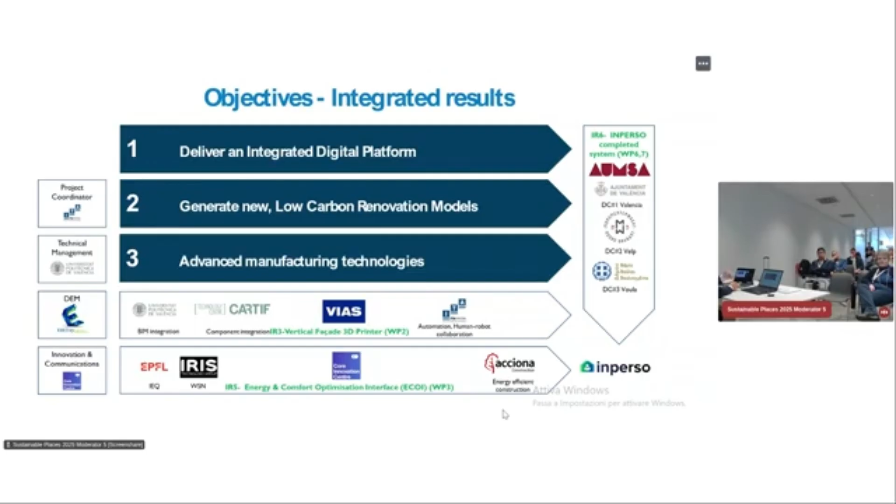The third is to improve the use of advanced manufacturing technologies - specifically, we are going to deploy on-site 3D facade printing, which Juan will explain in the next presentation. We also try to address personalized energy and comfort requirements of users, and finally we want to deliver a complete system test in the 3 pilots we are developing.

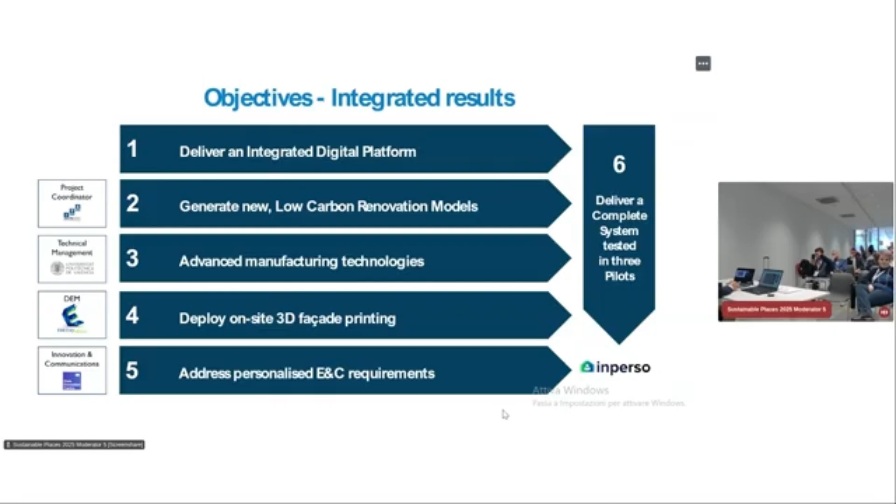And we are going to do this using advanced technologies, starting with the RE Suite platform, an AI and AR-based solution. The platform has already been developed in the project. We are in the third year of the project, and it's been tested in three demo cases in different scenarios.

All the information and data are available through a user-friendly interface, and we are including the Sky tool that can recognize objects from a point cloud and integrate it into a BIM model. It is also connected to the Rialto application, which uses artificial intelligence technology to audit and report on construction management work.

And R2M is developing a big part of this.

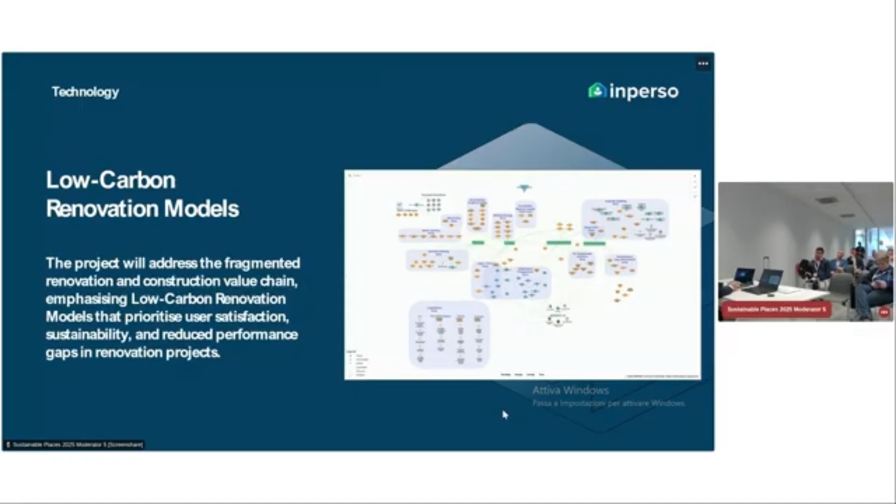Moving to the low carbon renovation models, INPERSO aims to address the fragmented construction value chain. The low carbon renovation models developed are prioritizing user satisfaction and sustainability, working together with all the stakeholders. We have also developed a dynamic map that has been integrated into the RE Suite platform, which will help all participants make better decisions.

The energy and comfort optimization interface is the last of the digital tools. It consists of a multi-stage energy consultant system that is connected to this interface, using a low-cost wireless sensor network to evaluate air quality, energy demand, and comfort conditions.

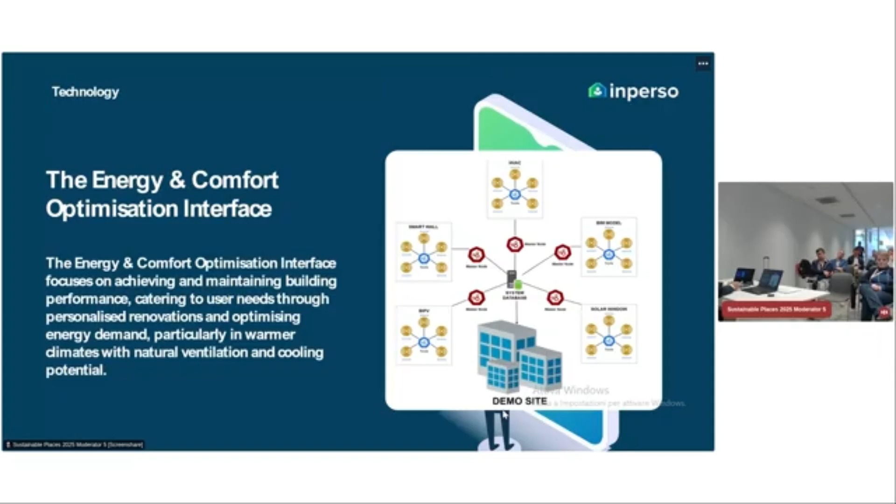And finally, the retrofit kit, the physical part of our project. It aims to reduce construction and demolition waste, enhance productivity, upskill the workforce, improve workplace conditions, and reduce embodied CO2 of buildings. This is the retrofit kit.

We can start with the smart wall. It's a prefabricated all-in-one wall panel, a multi-layer system that can even include autonomous air conditioning devices and other types of products such as PV panels, and so on.

The second is the energy pod. It's an intelligent plug-and-play HVAC system that uses PCM material, and it incorporates also energy storage and a PV inverter.

The third one is this type of building-integrated photovoltaic panels to be installed in roofs and balconies, with special interest in heritage buildings. Next, we have the solar window.

The solar window includes a PV Venetian blind shading device inside an insulating window between two glasses.

And well, this kit is composed of some of our innovative products that INPERSO is going to integrate in the pilots in order to achieve TRL 8.

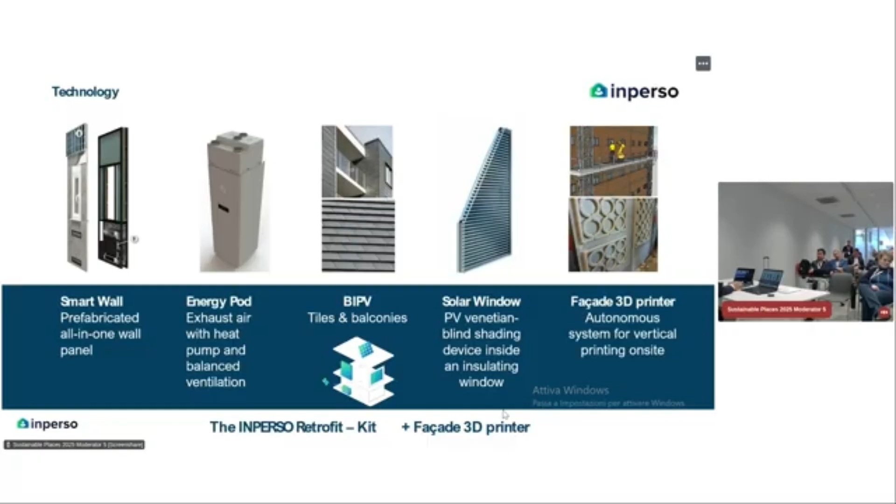Okay, let's move to the pilots, to our three pilots. We are going to explain briefly these technologies that have been implemented in the demo cases. One is located in Spain, the second in the Netherlands, and the third in Greece.

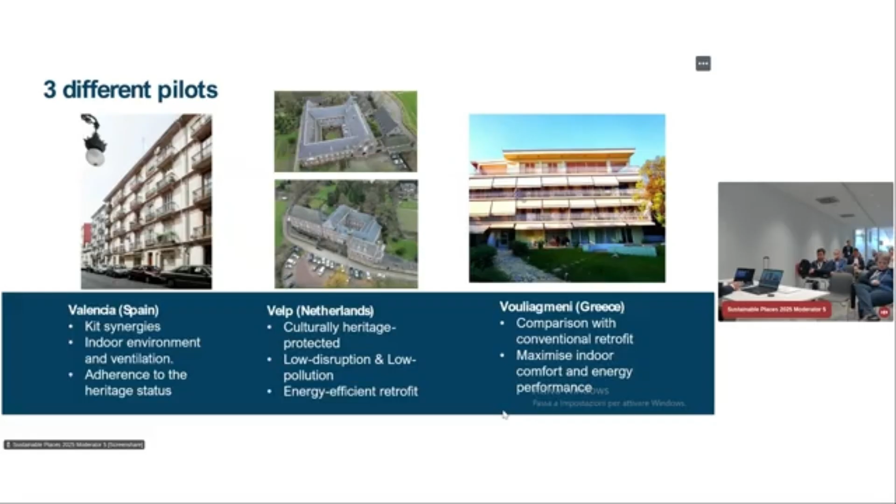The first is a social housing rental building whose main facade and volume are protected, with a market on its ground floor. Calle Estrella is located in the historic center of the city, and you can see in the pictures the two facades the building has, one facing the city and the other the courtyard.

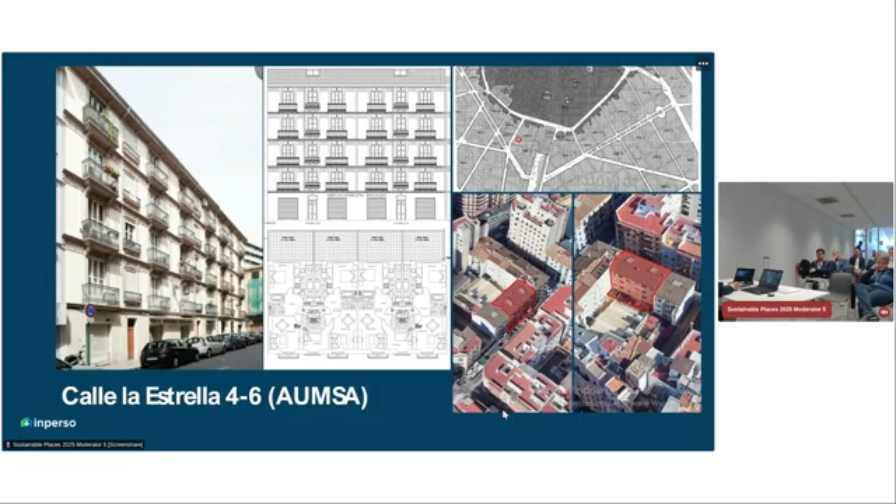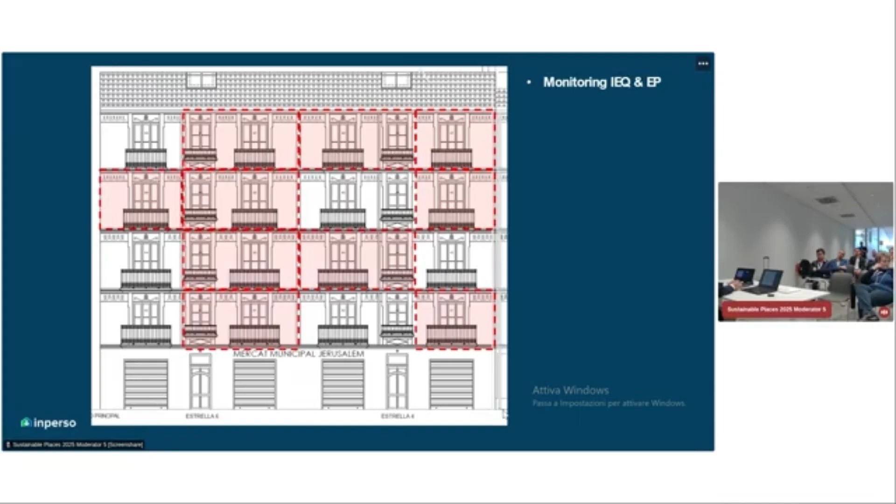And well, we have had multiple difficulties developing this project, but finally we are developing it. Of course, we are monitoring 10 of the 16 apartments, and we are doing interventions in 7 of them.

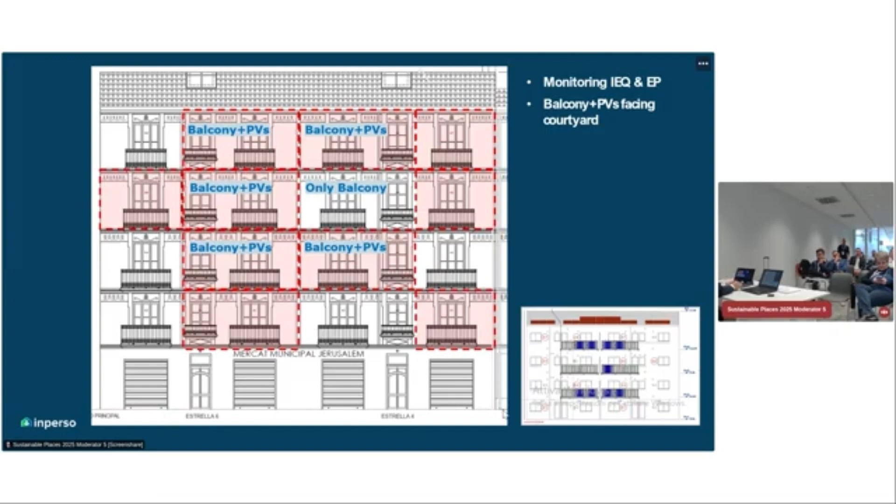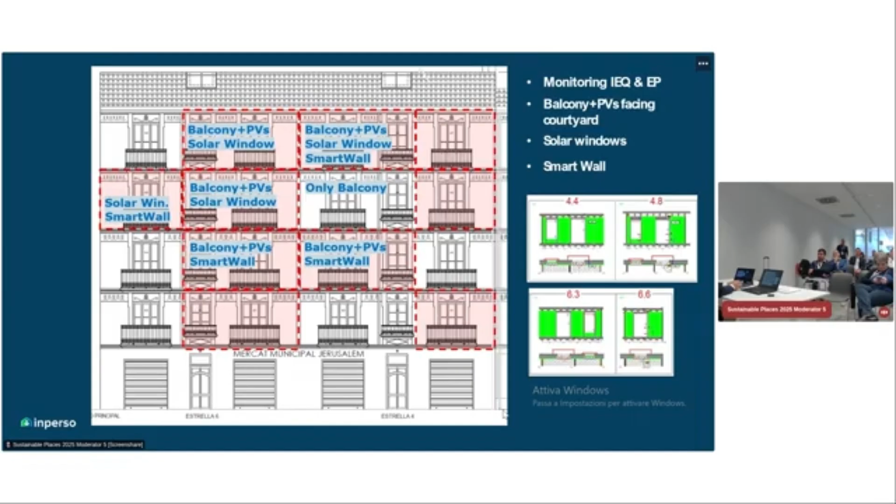We are going to install in 4 apartments this type of solar window, designed specifically for the protected main facade. We are also installing 4 units of the smart wall on the indoor side of the facade, and finally 4 units of the energy pod will be fitted in 4 apartments.

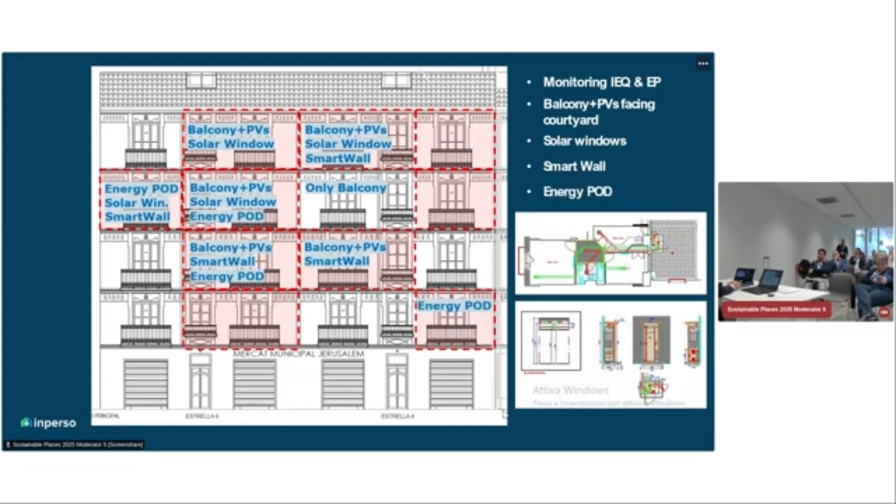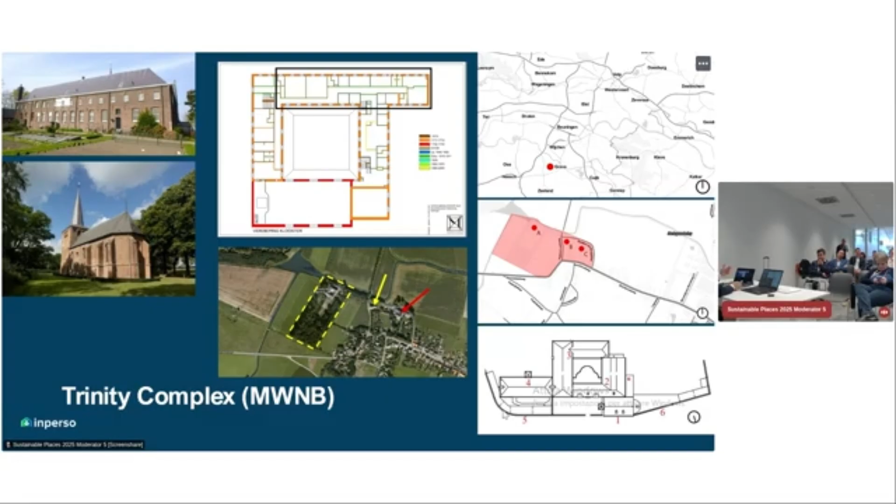Due to this high level of protection, the intervention has finally been restricted only to Bronckhorst Monastery, which has been monitored since the beginning of the project. Well, despite the small scale of the intervention, a big impact is expected due to the big issues that always appear in this type of heritage building. The work is small, but the results are huge.

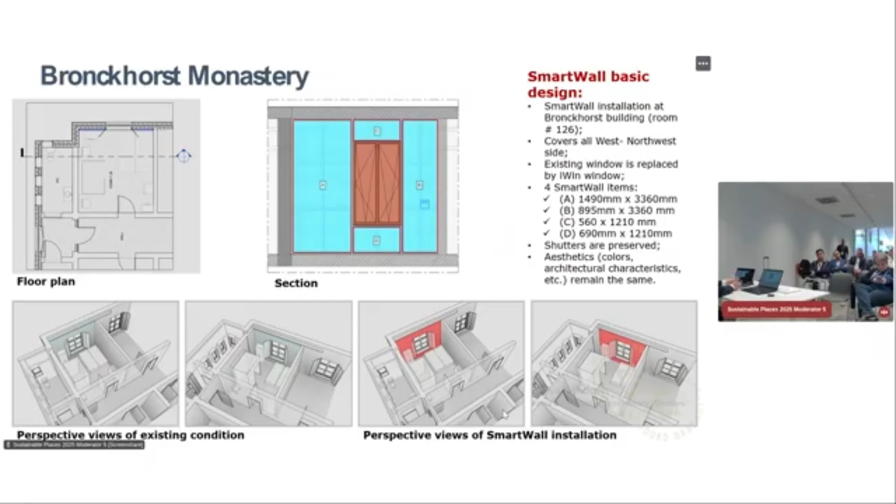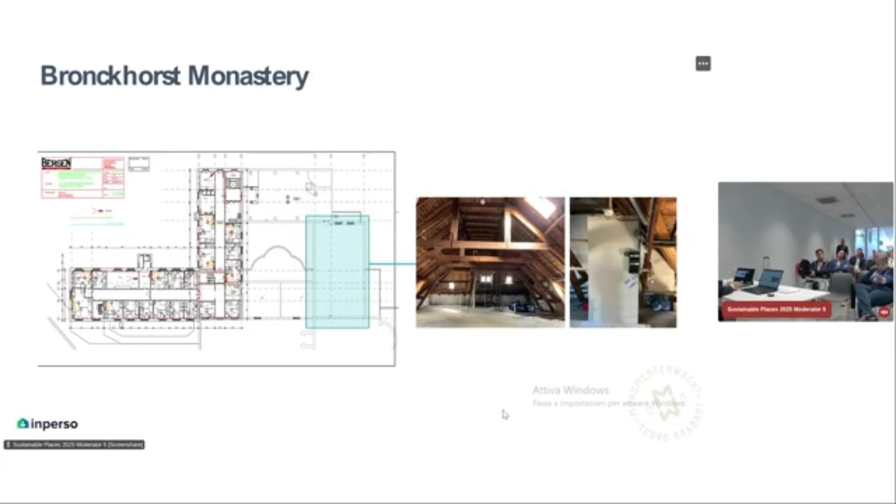Only one room is going to be intervened, installing a solar window and a smart wall unit. But also we are going to install in the area one energy pod in the attic to supply two of the rooms. And finally, we are going to do the most interesting intervention for me, the most interesting restoration work.

It consists of replacing part of the damaged chapel roof with photovoltaic tiles, with the same shape and the same finish as the originals.

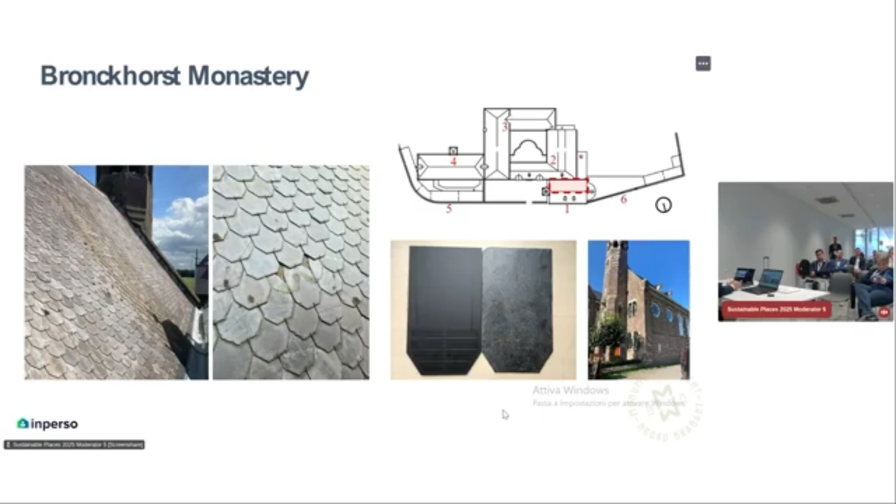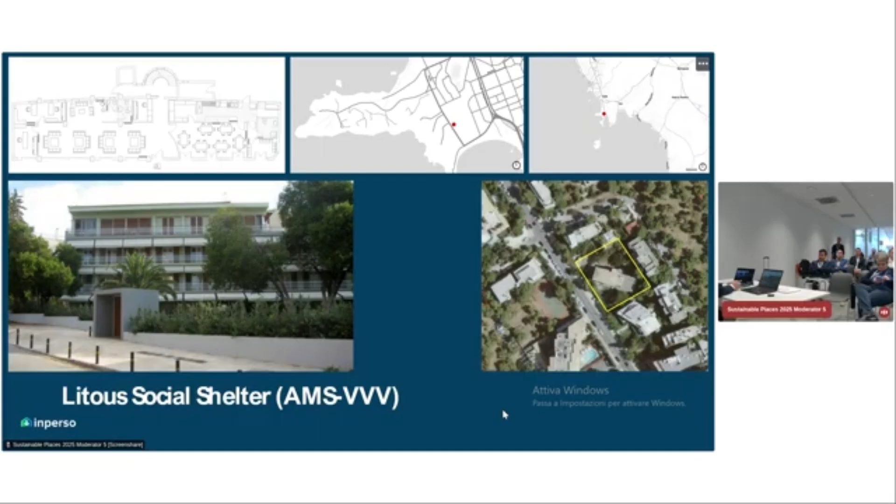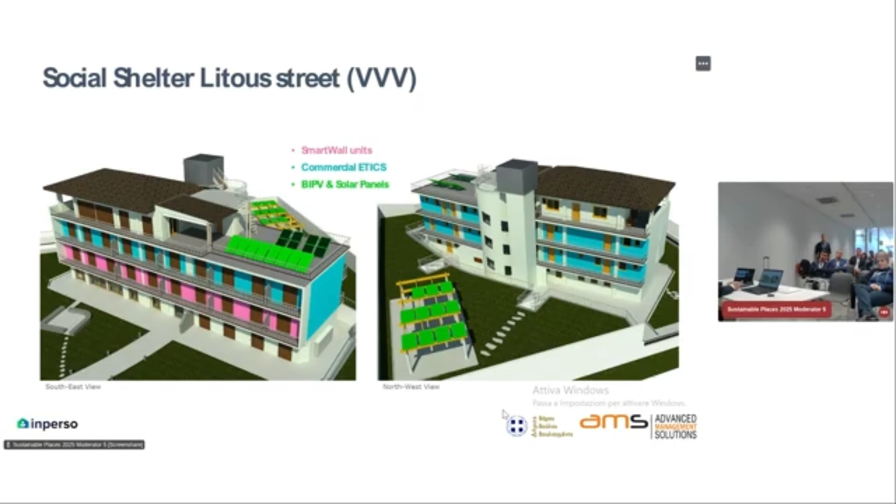At the same time, the smart wall solution was installed in the first level of the south facade, as you can see in pink, employing 27 units, 4 of them with ventilation system integrated. BIPV panels from Metsolar were also installed at the pergola, as you can see in green, and the roof, using conventional panels, not integrated panels.

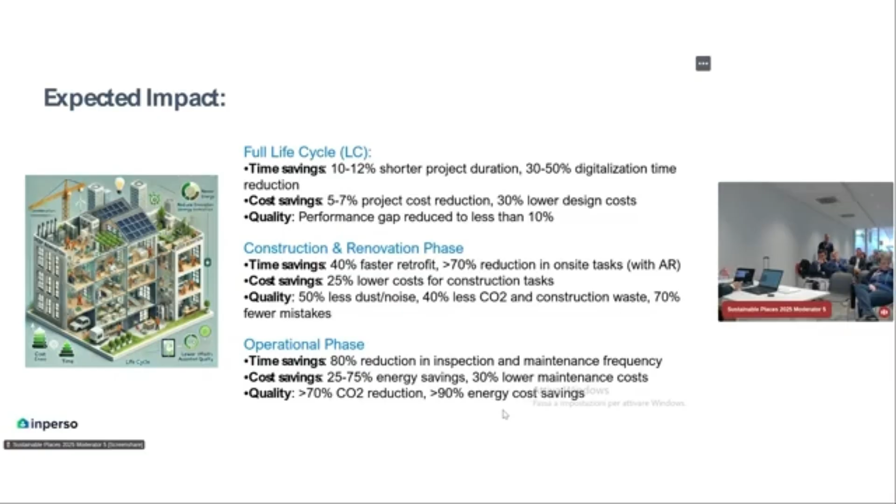And finally, this is the last one. We present the expected impacts that are already being evaluated. You can see both time and cost savings and quality improvements regarding the full life cycle, the construction phase, and the operational phase. Thank you for your attention. That's all.

If anybody has a question while I put up the next presentation, feel free to ask. I mean, do you have any questions about the project? If not, I'll ask one. I saw that you had a few sessions with the stakeholders. How different were they between different countries? I suppose you did one in Spain, one in the Netherlands, one in Greece.

Well, I'm not directly participating in the sessions, but I know something about it. I think in Greece it was very difficult because the tenants or residents are people at risk of exclusion, and they are not very interested in this type of renovation. They are also changing, every so often. I think the most important thing here is the contact with the managers of the building. They are willing to participate and to do this type of renovation. That was good with them, but with many restrictions about the residents.

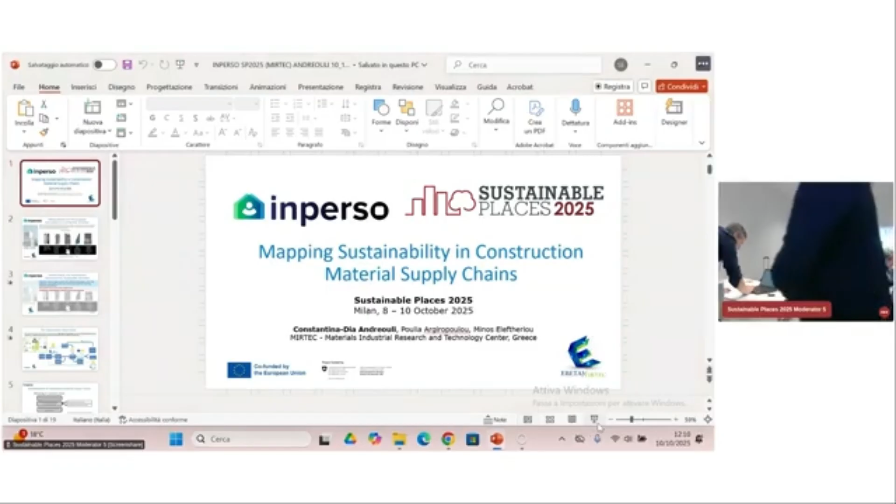Good afternoon to all of you. My name is Dia Andreouli, I'm coming from Greece, from MIRTEC, Materials Industrial Research and Technology Center. We'll go back to the INPERSO project. The first two presentations showed you the technologies we developed in this project, and now I will present our approach in mapping sustainability in construction material supply chains.

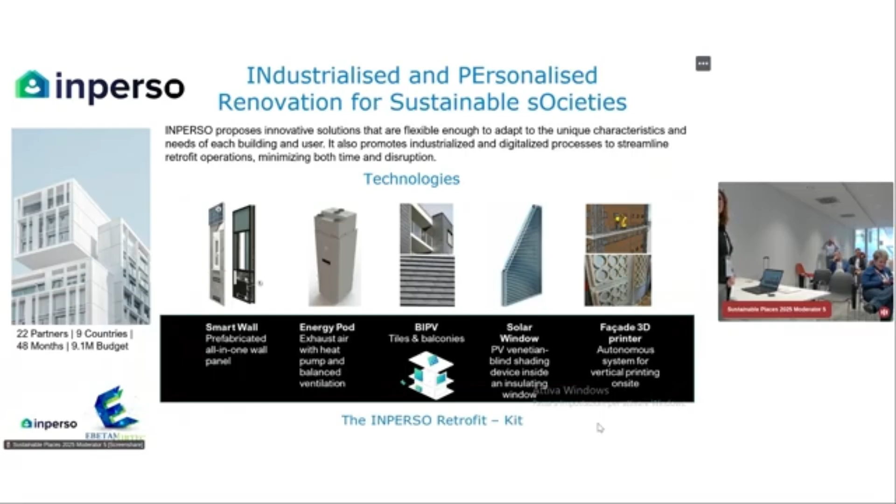To remind you a little bit of the technologies we're working on for INPERSO, we have 5 technologies: smart wall, wall panel, energy pod, building integrated photovoltaic system, solar windows, and facade 3D printer.

So the objective in our part of this work was to map the supply chain for all these 5 technologies, assess the qualitative sustainability and performance, and provide insights to improve the circularity of these technologies, because they are targeting a TRL 8. That means they are very close to market and all these issues need to be dealt with. So first we need to understand the construction value chain and then develop a methodology to identify the points that can be improved.

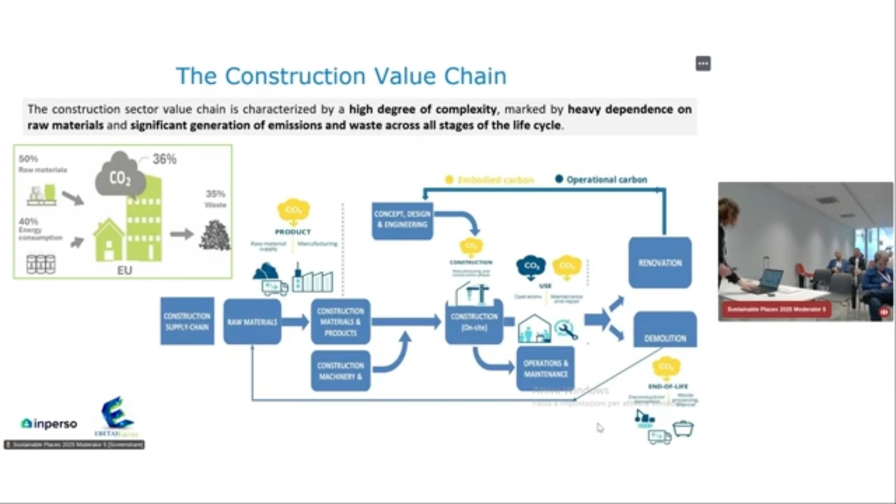So, in our approach to establish a sustainable supply chain, we are trying to make a qualitative analysis from the environmental point of view. We need to see the whole landscape, the EU policy, the regulatory landscape, in order to be ready and take actions for entering the market for the technologies we are targeting. Then we start with the collection of the data of the supply chain and proceed with the environmental sustainability assessment and validation.

Starting with the policy and regulatory landscape relevant to sustainability and supply chains, we can start with the directives that have to do with reporting. The first one was in force until last year, and we have the new Corporate Sustainability Reporting Directive, which is in force from this year. Large companies are under this scope, and this directive includes information on the entire value chain, so the entire value chain of construction and building materials is under the scope.

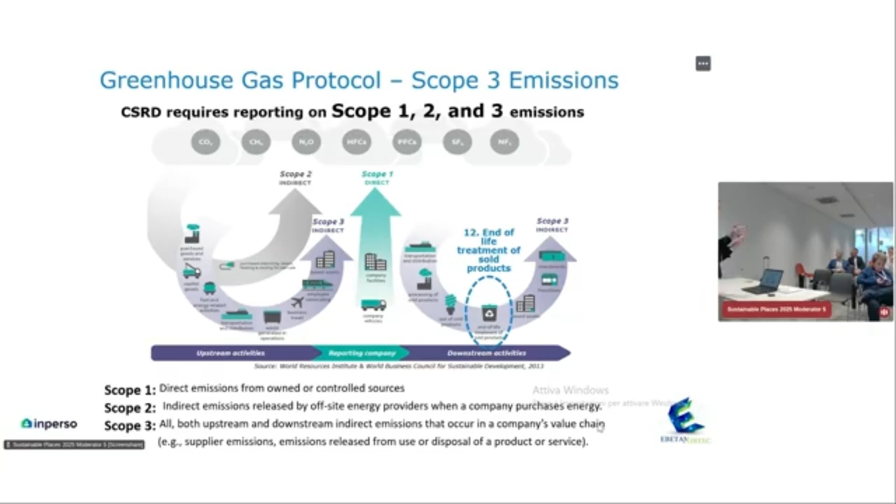For the Corporate Sustainability Reporting Directive, we also have the requirement for all scopes - scope 1, 2, and 3 emissions. That means, again, the supply chain is needed for all these calculations. And for scope 3, it is written that when there is a high scope 3 emissions percentage, companies need to take immediate actions. We can see that in the construction sector, for the companies there, scope 3 is 90%, so for these kinds of companies it is very important to take these actions.

Identify major emission hotspots through the screening of key suppliers, implement efficient logistics, and implement circular economy principles.

We also have the last new regulations. The new European Construction Products Regulation, published this year, will become applicable from next year, and for the first time it includes in Annex 1 the sustainable use of natural resources as a basic requirement for harmonized technical specifications. And the last one, the revised EPBD, as we saw from previous presentations, will also be related to global warming potential, and for all new buildings it will be mandatory from 2030.

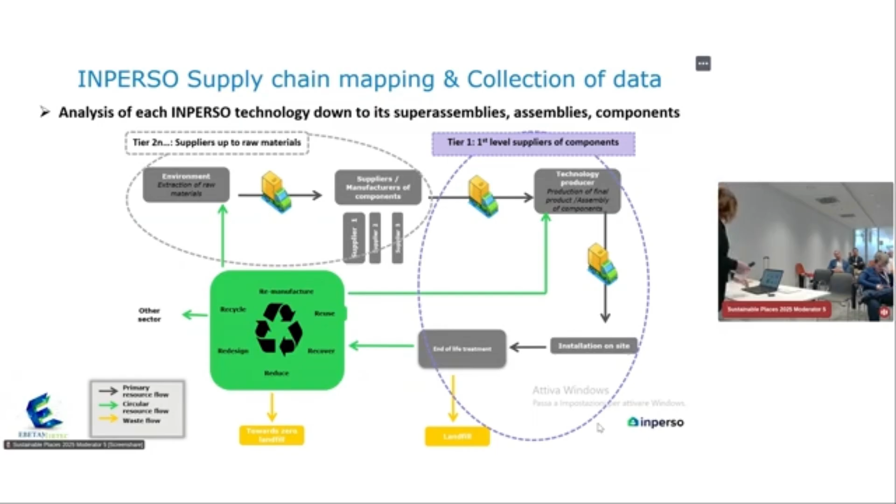So, in our approach, we started with collecting data for a linear supply chain. We start with the raw materials, with suppliers of the subcomponents for INPERSO technologies, then we have the assembly of all these components, the installation, the end-of-life treatment, and the landfill. This is the linear approach, but we want it to be circular. In a circular supply chain we also have reuse and recycling towards a zero landfill, meaning we need to take actions to have minimum construction and demolition waste also in this map.

In our activity collecting all this data, mainly the primary data, we faced difficulties because only the first level suppliers were able to give some input in our research. Even in this case, there was non-uniform collected data, so again there were some difficulties.

In order to go back to the value chain, we needed to take also secondary data and make a literature review for all the components from which we didn't have information. In order to focus on the sustainability evaluation, we decided to redirect our analysis toward evaluations of sustainability in the reverse supply chain.

For all 5 technologies of the INPERSO project, we did the assessment based on 6 evaluation criteria. We collected the locality of the first level suppliers, the degree of geographical concentration within the supply chain, the alignment with design for disassembly principles, the resilience of the supply chain with regard to critical and strategic raw materials, the efficiency of reuse and recycling processes, and the existence of efficient collection networks.

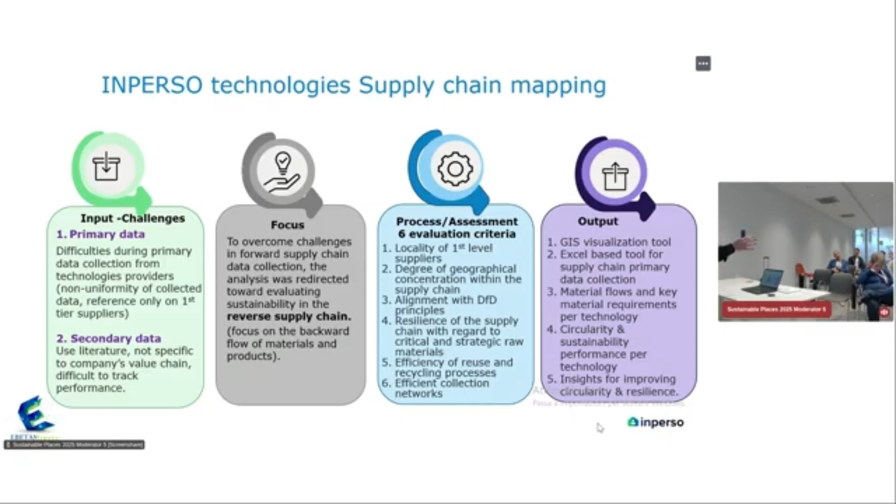The output of our work was the development of a geographic information system visualization tool, which we show in the next slide, an Excel tool with all the information we collected for all these technologies from primary data collection, the material flows and key materials required by each technology, and the circularity sustainability performance, trying to give insight to each technology provider for these 5 technologies in order to improve their performance.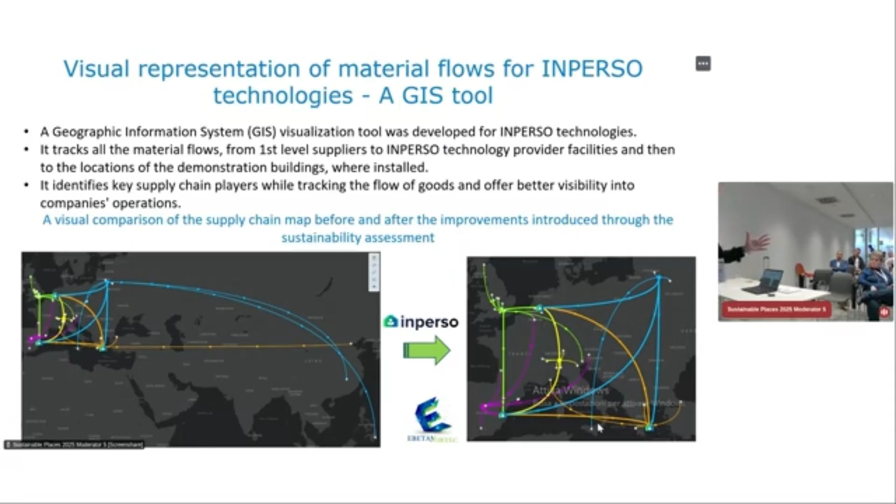So we can see that we managed to have in Europe all the technologies and all the materials in the INPERSO project. The other aspect that was very important is to understand that we need to minimize the construction and demolition waste.

In this case we had a big problem. We needed a baseline, and it was very difficult to find the methodology for a baseline. We decided that EPDs is one solution, one way to compare some trusted data with our case, and we started looking for EPDs.

Again we had difficulties, as you know. In the published EPDs, first of all, there are only a few EPDs. But for the published EPDs, you can see that most of the publications refer to the very first stages of the life cycle, and only a few for the end of life stage.

So when we managed to find some published relevant EPDs, again there were some difficulties because you have a new technology, an innovative technology. Then you need to make some assumptions in order to be in a position to make comparisons.

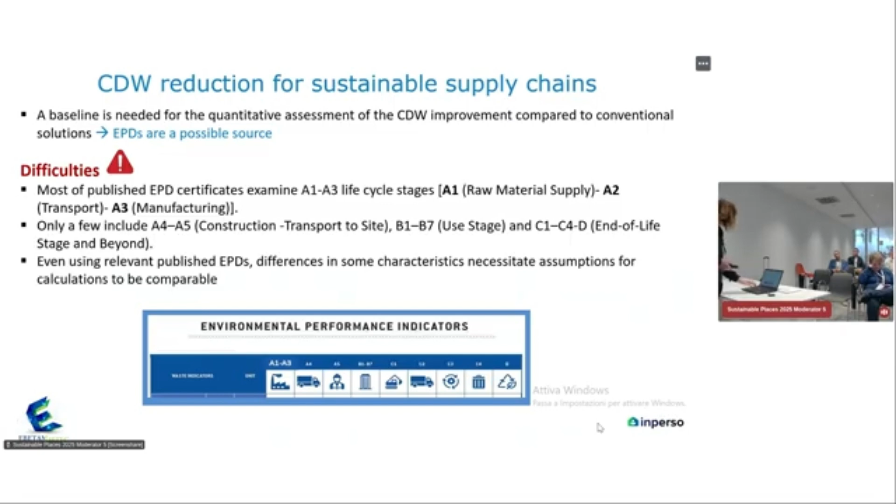Here we selected the case of smart wall from INPERSO technology in order to calculate the construction and demolition waste reduction, and to have some quantitative result.

We selected this prefabricated facade because it supports a wide selection of materials and can have several different sizes. This system allows a very easy redesign, so it was easy for us to redesign and change materials in order to see the effect on construction and demolition waste reduction.

For the comparison and the baseline, we used a published EPD with a conventional facade. The findings from this case showed that the integration of design for disassembly methodologies into the design phase was very, very important.

Replacing the chemical fasteners with mechanical ones allows selective demolition and drastically reduces construction and demolition waste.

Also related to materials, with careful material selection we had an improvement. For example, using inorganic coatings on cement boards, it was able to avoid landfilling after the end of life. Selecting the appropriate inorganic coating for this material, we could have a reduction of construction and demolition waste close to 98.5%.

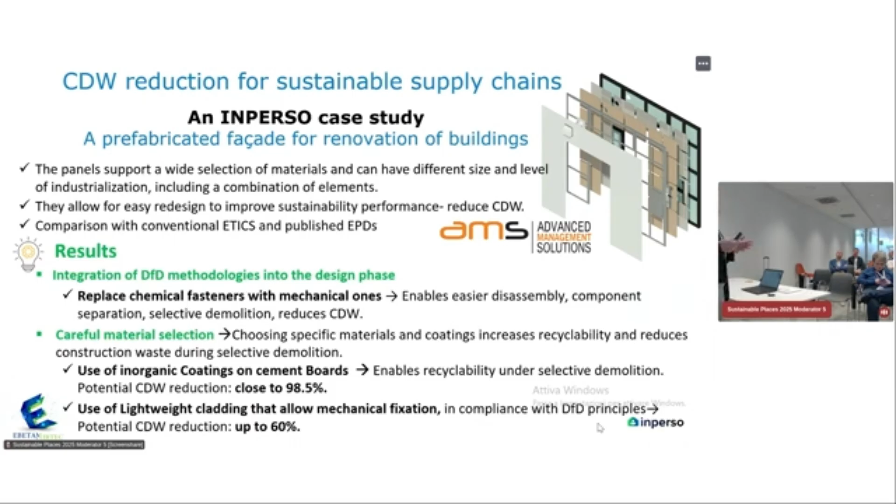Also, using lightweight cladding, again with mechanical fixation, it was ready to give construction and demolition waste reduction up to 60%.

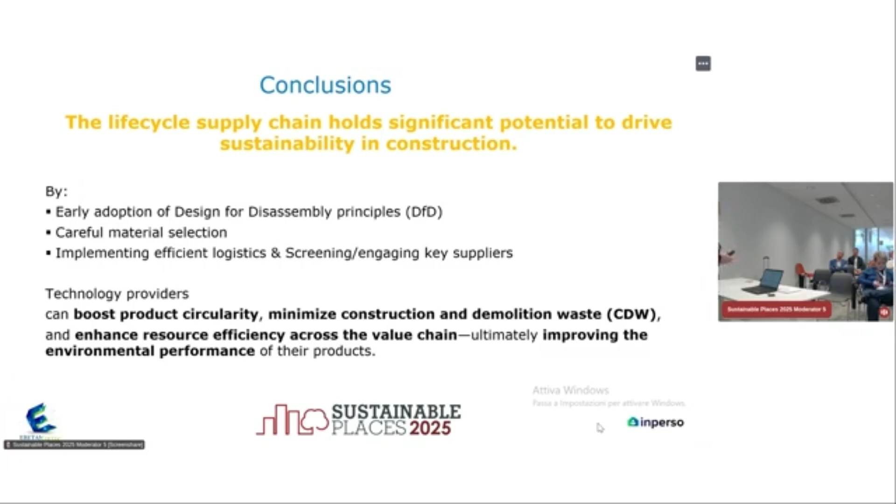Concluding, we can say that the life cycle supply chain holds significant potential to drive sustainability in construction. For example, by early adoption of design for disassembly principles, by careful material selection, and of course implementing efficient logistics and screening all the key suppliers, it is possible for technology developers to enter the market with reduced and improved environmental performance of their products. That's all from me, thank you.

Any question? Is there another presentation? No, it's the last one, and we close. We close on time, we have time for one question. You don't have. Yes, you have. Please.

Very, very interesting, thank you. And I'm also reflecting on what we do. And it's true that, well, maybe Julia didn't mention because it maybe not necessary, but when we looked for EPDs, we also decided quite early on that we will only, for the building level, at least use phases A1 to A3 of EPDs because we couldn't find the other phases. Yes, very rare. So that's another challenge that we never mentioned.

But do you have a French partner on the project or on your project? No. Because as far as we know, we looked at EPDs from different countries. The French regulation is the most strict one. And very recently they said you have to include everything and all the assumptions fully transparent. So actually there's a lot of pressure from the French government to give you the most accurate EPDs. But no, the other countries, not really. Maybe they will be pushed further on to give you more transparency, so that you can carefully select the logistics supply chain, which is very, very important. It makes, I think, a big difference.